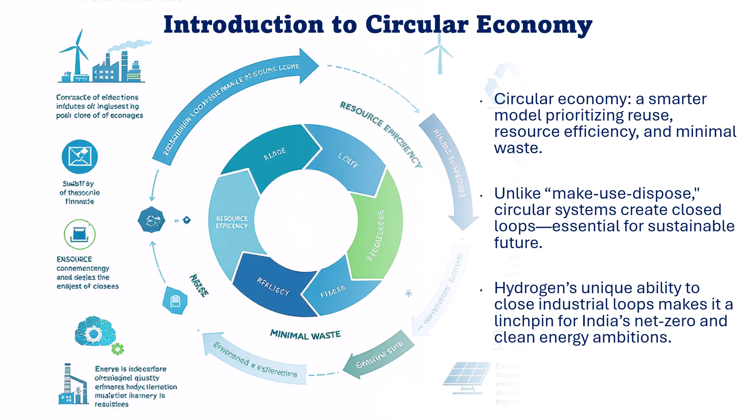Adopting circular principles helps us reduce environmental impact and dependency on virgin resources. Hydrogen's ability to facilitate material reuse and turn waste into valuable energy perfectly aligns with these principles. For India, transitioning to circular economy is essential to achieve sustainable growth, reduce import dependency, and meet climate goals.

Hydrogen is a versatile energy carrier that can be produced in several ways. Gray hydrogen is made from fossil fuels and emits carbon dioxide. Blue hydrogen adds carbon capture to reduce emissions. Green hydrogen uses renewable electricity to split water, resulting in near zero emissions, making it most compatible with circular economy.

Another type of hydrogen is golden hydrogen that is naturally present in the Earth's crust, which is produced by various geological processes which we discussed in an earlier lecture. Hydrogen can power vehicles, serve as an industrial feedstock, or store surplus renewable energy. Importantly, when used, it produces only water vapor, not pollution. The move towards green hydrogen is crucial for industries looking to lower their carbon footprints and transition towards circular, sustainable operations worldwide.

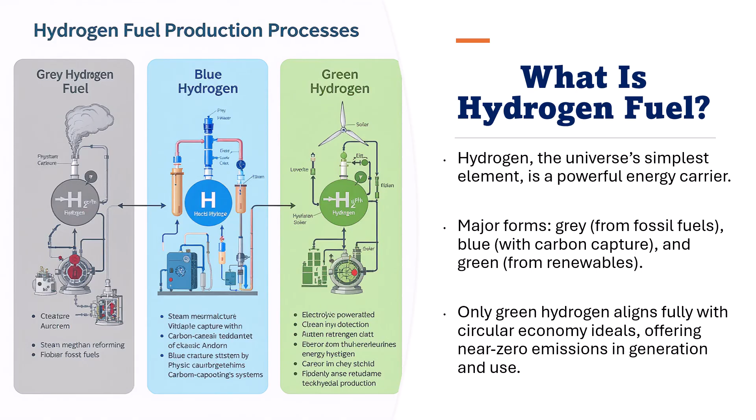Hydrogen is key for decarbonizing sectors that are hard to electrify, such as steel, cement, and chemicals. It closes resource loops by enabling waste-to-energy applications, turning industrial byproducts or organic waste into useful fuel. Hydrogen also helps integrate and stabilize renewable energy by acting as storage for surplus power, smoothing supply fluctuations.

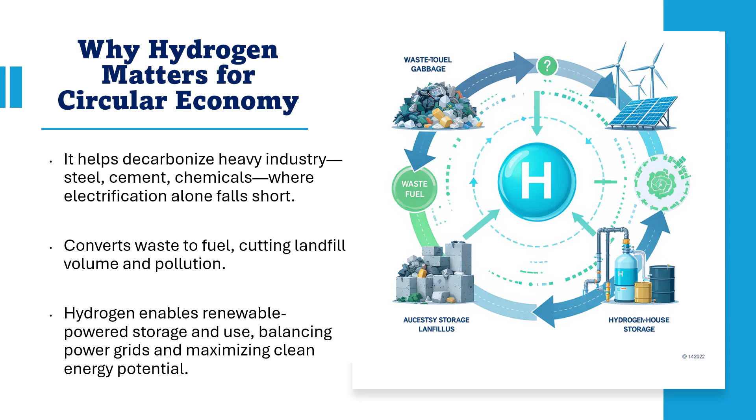Its clean combustion means fewer pollutants and improved local air quality. By fostering more efficient resource use and reducing greenhouse gas emissions, hydrogen advances the goal of circular economy, making energy systems more resilient, sustainable, and adaptable to future needs.

Hydrogen fits circular principles by enabling the recyclability and long-term maintenance of key technology like fuel cells and electrolyzers. Industrial symbiosis evolves as companies share byproducts, waste heat, gases, or even recovered water across facilities, increasing overall efficiency.

Hydrogen's unique role as a medium for storing renewable energy ensures that excess power isn't wasted but redeployed later when demand is high. These practices drive down overall resource consumption, lower environmental impact, and make industrial processes cleaner. By designing systems for end-of-life recovery and repurposing, we maximize the value extracted from every resource input.

India is advancing a bold circular economy agenda to address its rapid urbanization, industrial growth, and resource constraints. The government's vision emphasizes optimizing resources, extending product life cycles, and embracing clean technology like hydrogen. Policies and funding target resource efficiency and emission reductions across manufacturing, agriculture, transportation, and waste management.

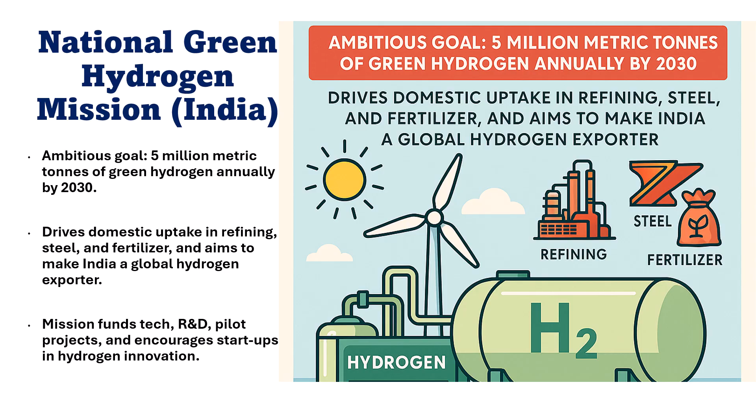India is developing strategic hydrogen hubs in locations like Mundra, Gopalpur, close to abundant renewable energy sources and export ports. These clusters bring together producers, large industrial users, and export infrastructure. They are integrated with heavy industries such as steel and fertilizers to directly replace fossil-based processes with hydrogen-fueled alternatives.

Clustering enables economies of scale, streamlined logistics, and shared facilities for storage and transport. These hubs don't just serve domestic needs, they are designed for international exports, making India a potential hydrogen supplier for Europe, Asia, and beyond.

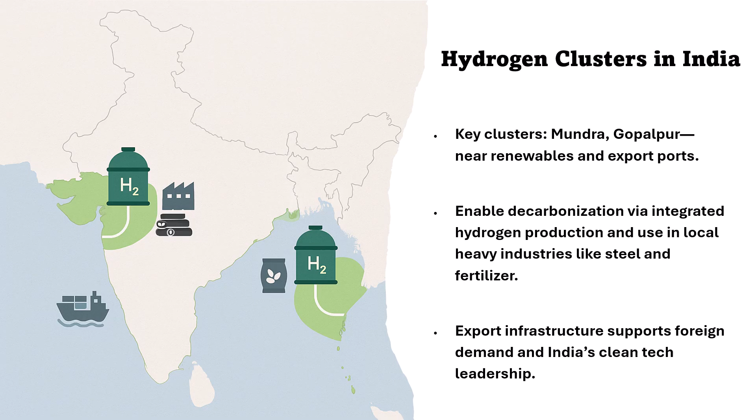Circularity isn't just about recycling waste, it is about closing every possible loop. Industries in India are piloting projects where carbon dioxide emissions are captured and combined with green hydrogen to create methanol and eco-friendly polymers, new products from what was once waste.

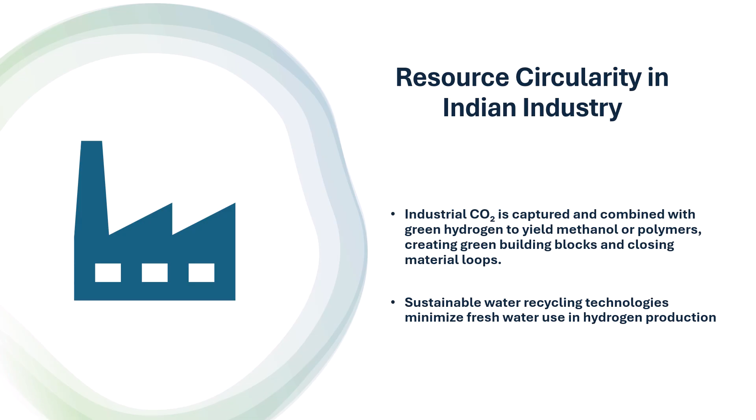Water is another concern. Advanced recycling systems are being adopted to ensure that electrolyzers, which need pure water, don't increase pressure on already scarce resources. These efforts illustrate practical ways to embed hydrogen into truly circular industrial systems, supporting sustainability by design rather than as an afterthought.

Building circular hydrogen infrastructure means thinking beyond initial deployment. Electrolyzers and fuel cells are designed for modular assembly, easy maintenance, and eventual recycling. Innovative recovery methods such as hydrometallurgy and advanced sound wave technology help reclaim precious metals like platinum at high rates.

Infrastructure is mapped to existing logistics, ensuring quick distribution and minimal losses across the supply chain. By planning upgrades, repairability, and reuse at the start, India can ensure the life cycle benefits of hydrogen technologies align with the broader circular economy goals.

India's hydrogen hubs serve dual functions. Domestically, they anchor power and industrial sectors to clean hydrogen supply, supplying steelworks, refineries, and fertilizer plants. Strategically located near ports like Mundra and rail corridors, these hubs can efficiently move hydrogen to international markets, answering the growing demand from Europe and East Asia.

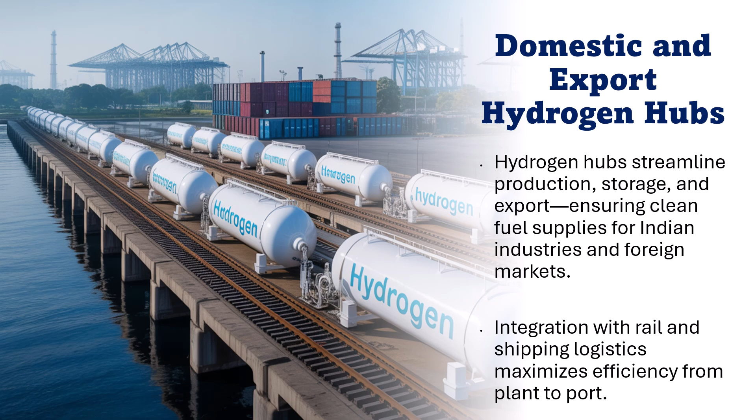Despite strong momentum, India faces significant hurdles. Green hydrogen production is still costly due to technology and infrastructure requirements. Electrolysis requires pure water, raising sustainability questions in water-stressed regions. So, efficient recycling is vital.

Investments must be scaled up rapidly and private sector involvement is needed for innovation. Policy support, clearer regulation, and public-private partnership will determine how soon green hydrogen becomes cost competitive. Overcoming these challenges is key for India to solidify its place as a global hydrogen leader and fulfill broader sustainable development goals.

Globally, green hydrogen is advancing as nations push for zero-emission targets. Leading players include the European Union, Japan, and China, who invest in integrated hydrogen and clean industry clusters. The focus extends beyond energy to mobility, chemicals, and even aviation.

Trendsetters apply circularity through shared infrastructure, byproduct exchange, and waste-to-hydrogen plants. Policy support, financing innovation, and collaborative research are common themes. These global trends offer case studies and partnership opportunities for India, reinforcing the interconnectedness of the hydrogen transition in the world.

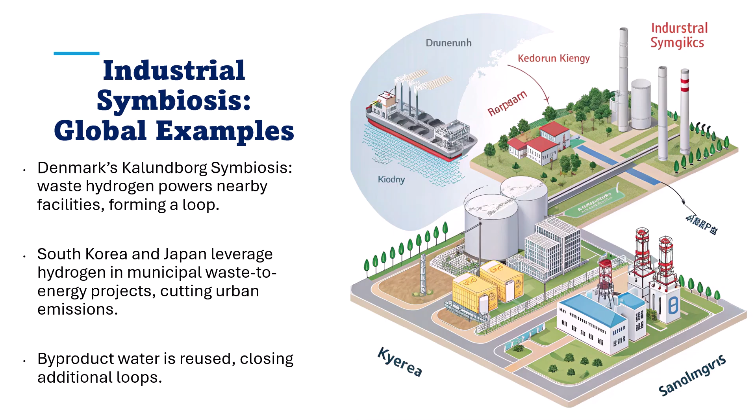Innovative technologies now allow conversion of waste like crop residue, food scraps, and plastic into hydrogen via gasification or fermentation. The resulting hydrogen then powers fuel cells for electricity, producing clean energy while drastically reducing landfill and associated pollution.

Municipalities around the world are integrating waste-to-energy with microgrids, enhancing resilience and supporting local economies. These systems exemplify the circular economy in action, turning one sector's waste into another sector's resource, and in the process closing the loop and cutting carbon emissions.

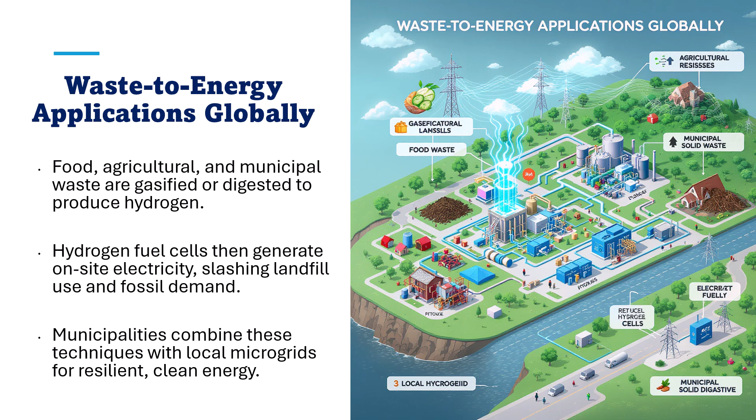A truly circular hydrogen economy must recover and recycle high-value materials from fuel cells and electrolyzers, for instance platinum and other rare metals. New physical and chemical recovery processes, some using ultrasound waves, now achieve over 90% recovery efficiency.

Product designs increasingly allow easy disassembly and reuse of parts. Global standards are being deployed for recycling logistics and certification, ensuring that hydrogen technologies themselves are part of the value loop. This commitment to recyclability reduces supply risk and improves environmental impacts.

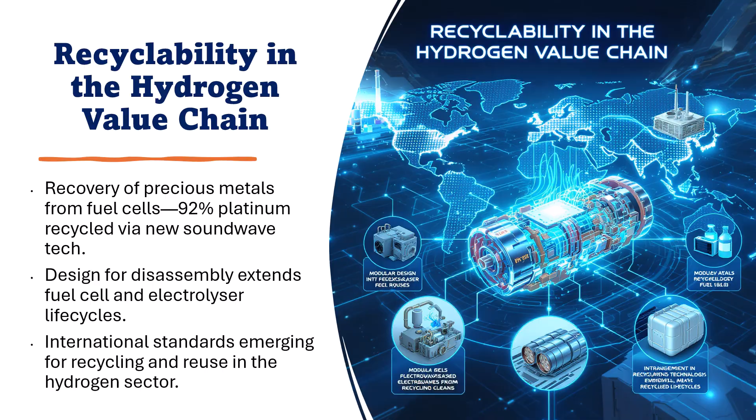Adopting hydrogen in a circular model brings broad benefits. It strengthens national energy security, reducing reliance on fossil imports, and makes power systems more resilient to supply shocks. Flexible hydrogen storage smooths out intermittent renewable generation, helping balance supply and demand.

The circular approach also fosters innovation: new materials, better recycling methods, and updated industrial processes. Collectively, this shift drives emissions down, lowers costs over time, and supports a new era of environmentally sustainable industry.

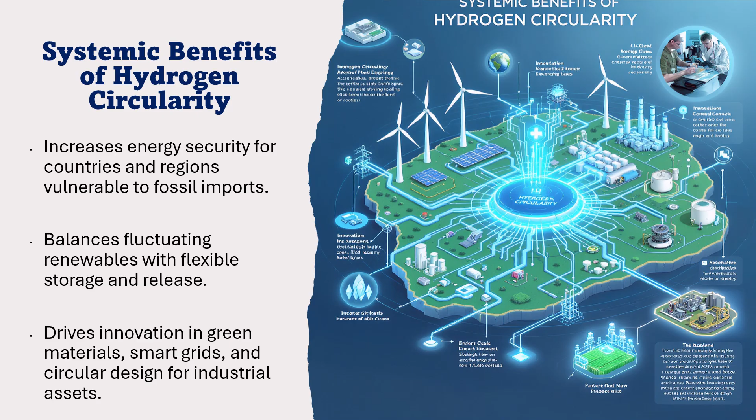There are major global obstacles to overcome. Grey hydrogen produced from fossil fuels still dominates due to lower cost, making the transition to green hydrogen challenging. Securing closed and predictable supply chains for key materials like platinum requires international cooperation in recycling and governance.

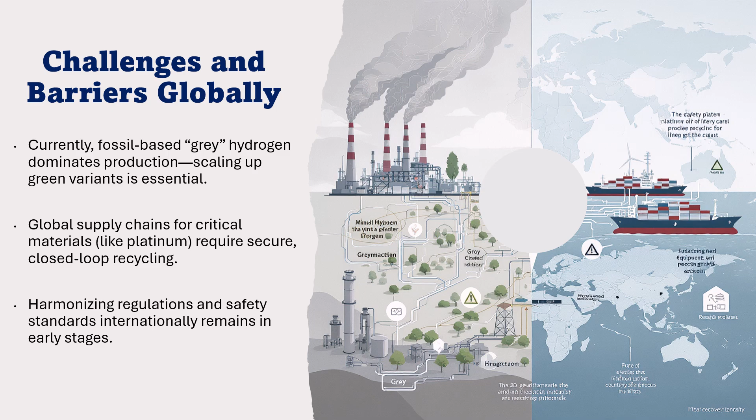Developing safe, efficient cross-border standards for hydrogen transport and storage is another hurdle. Coordinated investment, policy alignment, and technology innovation will be needed to unlock the full potential of the circular hydrogen economy worldwide.

The journey to a circular hydrogen economy requires focused research into more efficient and affordable electrolysis methods, new waste-to-energy technologies, and advanced recycling systems. Cross-industry and global partnerships can speed up technology learning and deployment. Governments and institutions should update regulations to encourage circular design, material recovery, and knowledge sharing.

As India scales into the hydrogen sector, learning from global leaders and fostering open collaboration will ensure shared success, accelerating the transition for everyone. In conclusion, hydrogen holds immense promise as a catalyst for a circular economy in India and

worldwide. From powering clean industry to enabling waste conversion and resource recovery, it is shaping a more sustainable, resilient future. Achieving this vision depends upon upfront investment, circular product design, robust recycling systems, and supportive policy frameworks. With coordinated innovation, partnership, and commitment, hydrogen will enable industries and communities to transition rapidly to a cleaner, highly efficient, resource-looped economy.